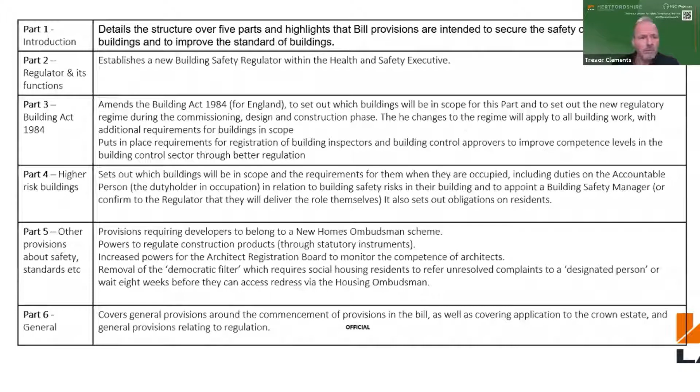Now, in a previous briefing, some of you may remember I mentioned comments from the Parliamentary Scrutiny Committee about the draft bill that were particularly relevant to the Building Control Service. This was recommendation 21. The committee said that we recommend that duty holder choice be removed entirely from the building control system. Wow, that's a radical step, isn't it? And it be replaced by a system of independent appointment, and that this be made explicit either in the bill or in secondary legislation to be published alongside it.

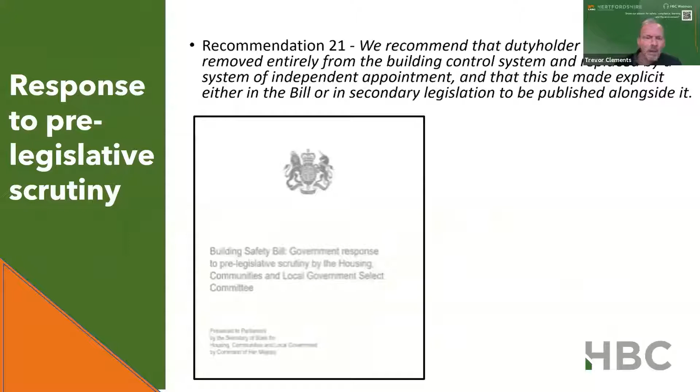Pretty groundbreaking stuff. Well, I think most of us in the know anticipated it wasn't going to happen. The government felt that the introduction of new rules to oversee the competence of building control professionals was sufficient. What you see there is paragraph 423 of clause 43 that amends the Building Act to require that building control authorities and registered building control approvers must obtain and consider the advice of a registered building inspector each time they want to make a decision on a restricted function - i.e. going about the role of building control, checking plans and checking work on site.

For building control authorities, in the case of failure to use a registered building inspector to carry out restricted activities, or to seek advice from a registered inspector, their building control decision could be called into question and subject to judicial review for failing to follow the legislative process.

So we're going to need to employ surveyors who've demonstrated their ability to work on the different grades of buildings that we cover. We cover everything from the 30-storey block of flats to Mrs. Bloggs's rear extension. Anybody involved in those schemes has to demonstrate they're competent to do so and be independently accredited for that.

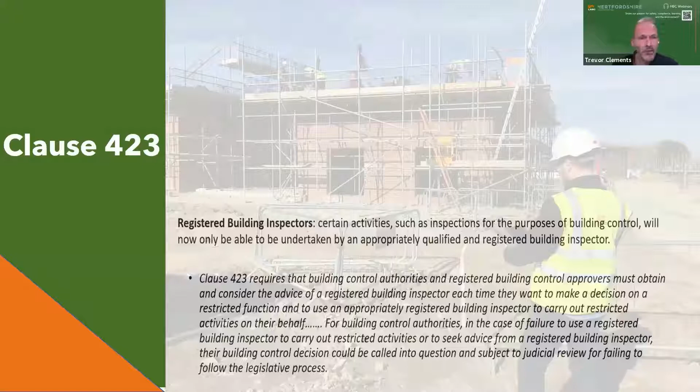Anyway, enough of that, that's not what you signed up to hear about. Let's move on with the Building Safety Bill.

So in addition to these new rules for our surveyors, the new Act will also place duties on those who procure, plan, manage and undertake building work. These duty holders will be required to actively consider and manage building safety risks throughout the commissioning, design and construction processes, ensuring that their designs, as well as the building work, comply with building regulations requirements. There are three main roles for the construction process: the client taking the responsibilities, the principal designer and the principal contractor. Effectively what it's doing is placing additional building safety responsibilities on the duty holders identified in the CDM regulations that came in 2015.

So there you've got the principal designer. Obviously they would need to plan, manage and monitor their design work to ensure that if built, it complies with the regs, and ensure that all their designers in their team cooperate and communicate to that end. They also communicate, of course, with the client and the principal contractor.

And the principal contractor, of course, is appointed to be in control of the whole project during the construction phase, with similar duties to those of the designer, but in relation to the building work rather than the design work. This is a useful slide.

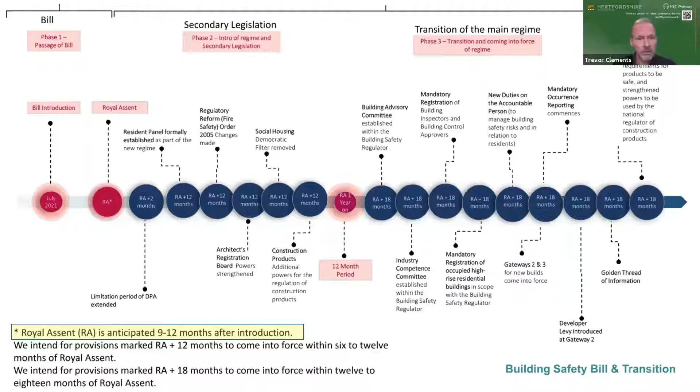So we already have a draft of some secondary legislation, so I thought I'd let you have a quick look at that, related to the bill. This is the Higher Risk Buildings Regulation 2021.

What it's doing is defining higher risk buildings as those with at least 2 residential units, and that includes care homes and hospitals as well. Whilst it does include care homes and hospitals, it excludes them from Part 4 of the bill, which relates to the ongoing control of occupied buildings. So I think they're seen as being professionally managed and not needing that sort of scrutiny once occupied, whereas flats will come under Section 4, Part 4.

So this legislation gives the definitions for care homes, hospitals and residential buildings. It specifies how height and the number of storeys should be determined. As we know, the building height for in-scope buildings, i.e. high risk buildings, is over 18 metres or more than 7 storeys. 7 storeys or more, and that's covered in the bill itself.

That's an arbitrary height, isn't it? Why do they hang their hat on that one? A lot of people are saying that could change. There's a few fire officers out there who've probably got some good informed opinions on that, because I think 11 metres is probably a height which might be more appropriate. That's a height I think I'm right in saying, and feel free to shoot me down on the chat if I'm wrong, but that's where external firefighting gets very difficult after 11 metres, in terms of the modern equipment used today. I nearly said don't shoot me down in flames, but that would have been a terrible pun, so I'm glad I didn't say that.

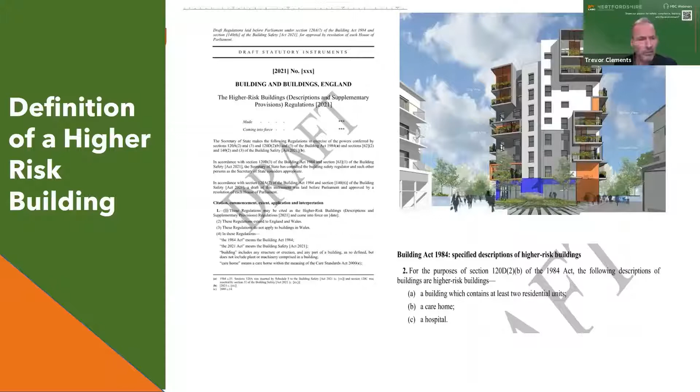Anyway, talking about all this 18 metres and flats and high risk buildings, it's easy to confuse the new rules with rules that have been in place since December 2018 for buildings over 18 metres containing flats. We've been applying those for some time now, and that has been quite problematic in insisting that facades only contain, or nearly all materials are non-combustible A1 or A2 class materials, which has had its challenges for anybody involved in those sort of buildings, which I won't go into because time doesn't permit, but it's been interesting.

A few key sections in the finished bill. We're extending the limitation period on the Defective Premises Act, which was 6 years, and is now going to be 15 years. In other words, this is the time in which a homeowner has a right to look for compensation. Time will tell how that might influence an already difficult insurance market, and we'll also have to look at how there may be implications for the liability of local authorities. This will all affect the insurance market in a bad way, and we don't need it to get any more tricky, that's for sure.

The bill also enables building owners to levy a building safety charge on leaseholders. There were changes made from the original draft so that this charge can only cover the ongoing costs of the new regime. They can't use it to cover historical defects in the building to carry out remedial work. So that's the building safety charge on leaseholders.

There's a lot of money involved here because there's also requirements for building owners to consider alternative funding. If they're going to place charges on leaseholders, they must firstly demonstrate that they've explored all reasonable options for raising the cost of remedial works by other means before making a charge to those leaseholders. So there may be government grants available, there may be warranties attached to the buildings, there may be a potential for litigation whereby that money can be raised without making a charge, and it's now mandatory that they consider that.

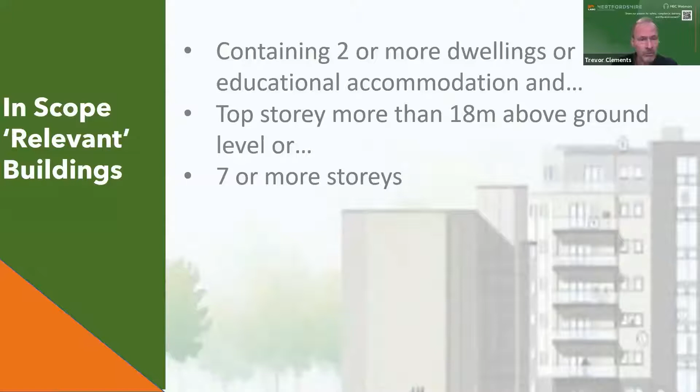As mentioned, the scope may change, and we'll keep our ear to the ground on that. This is relating to full planning applications, not outline ones, they're exempt. And the other gateways, 2 and 3, construction stage and then completion and handover stage, will be introduced much later on, as you saw from the schedule in a previous slide.

So on those buildings, to go through Gateway 1, planning must consult for the provision of a new building that's in scope, the development of an existing building so that it becomes in scope, or is already in scope and is being developed, and development within the curtilage of a relevant building, because as we know, changes can be made that have an effect on access to the building for fighting a fire in the building. You know, Grenfell taught us that, and lessons learned, too late in that case, unfortunately.

So what will applicants have to do? Well, they'll be required to submit a short and concise fire safety statement to planning. It's similar to an access statement, if you know what they are, and won't be anywhere near as detailed as a fire safety strategy. That comes later. That's the sort of thing that we need at Gateway 2, and building control would be scrutinising that. But this is something a little bit more simple.

And as you probably know, the consultee role will be taken on by the new national regulator when set up. So at the moment it's the HSE, but it will go to the new regulator.

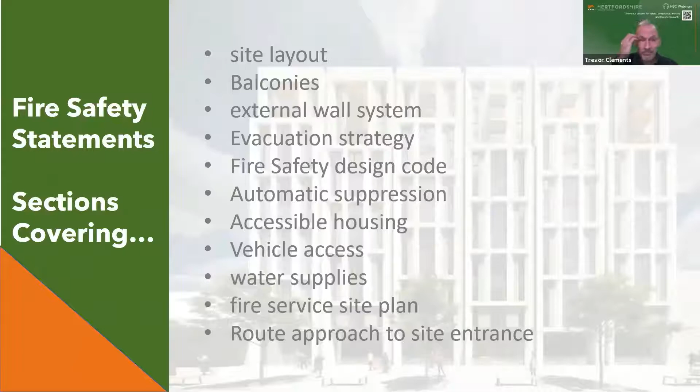Hydrants, dry risers, wet risers, access points to buildings. I could go on, but I won't. But these are all things that are allied to building regulations compliance in terms of B1 and B5 in particular. So that's the bones I was mentioning on the building safety bill.

Before I move over to a few slides on the Future Homes Standard, just a quick slide showing the proposed setup of the new regulator. You see he's got four strings to his bow - I can say he because it is a he, we've been told, well, he's already appointed. Peter Baker, who was already with the HSE, was appointed as the first chief regulator of buildings. And this is what he'll be doing.

So he'll be overseeing the performance standards of the building control profession, looking over our shoulder, overseeing the competency of the construction industry. So all those duty holders, the individuals and organisations with statutory duties under the new legislation will be regulated by him.

And he'll be coordinating the Building Advisory Committee - that's a new organisation that will replace BRAC, the Building Regs Advisory Committee that used to exist. And of course, there's the big new role as the regulator for high risk buildings, working with our good friends at the Fire Rescue Services and with local authority building control to assess schemes at gateways 2 and 3, and open that gate for people, hopefully, when things are seen to be compliant.

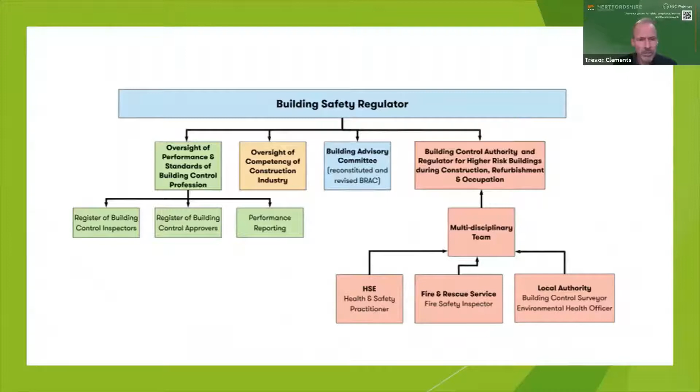So just a few slides now before we conclude, covering the Future Homes Standard. This is coming in 2025, and it's a big step towards the government aim of net zero in 2050.

And I know our little Scandinavian friend said blah, blah, blah to that, but I'm going to take it seriously, and we're going to do our best to do our bit towards that aim.

There'll be a 12-month transition period from then, meaning any applications received before this date must start work by June 2023. So once the bar comes down, you've got a year's grace to start the work. But something to take on board: this applies to individual buildings, so that might be a house or a block of flats. You just can't start to build one unit in a residential development of 50 and expect it all to comply with old regs. Anything not started within that 12 months will have to meet the new requirements, and that will be quite onerous - there are going to be big implications in meeting those new standards.

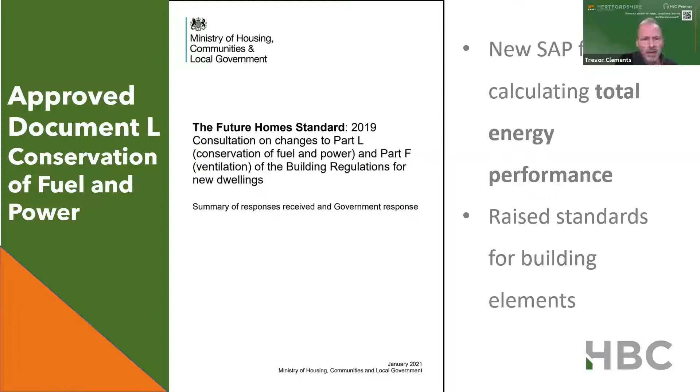So please don't ask too many questions on that subject.

What else can we expect in the new Approved Document L? Well, as anybody would have guessed, there's reduced U-values for walls, floors, roofs, doors and windows. That's not only in relation to the notional building that sets the targets for new buildings in the SAP calculation, but also for alterations and extensions to existing buildings. So it's going to be even harder, and the cavity wall insulation people are going to have to scratch their heads again and come up with new solutions. We'll have to rewrite our book on U-values of elements and solutions, which has been much used around the country, but will become obsolete - that will take a bit of work.

Apart from that, there'll be tighter targets for air leakage, and because of that, there will be changes to Approved Document F dealing with ventilation, so that ventilation is compatible with those more airtight standards - because it's so critical that this doesn't adversely affect indoor air quality, which is poor enough as it is.

There's increased heating system efficiency targets and smarter control systems, and that will include mandatory use of independent thermostatic controls in every room, and that will also include existing dwellings where they're being altered, and there's limits on the temperature of primary flow to radiators, etc.

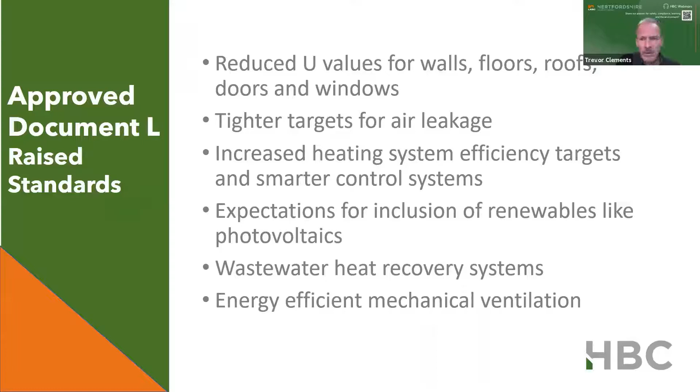Quickly, more detailed guidance on approved document F, which covers ventilation, which we're waiting on. There'll be more detailed guidance on considering external pollution when designing for ventilation in built up areas. No point in having windows and vents and things like that if you're right next to a busy road and you're just going to bring traffic fumes into the property.

So nobody's ever going to open those windows. Tighter controls on retrofit work, recognizing how these changes can introduce air quality issues. The simplest one being you change out the windows, you suddenly lose all the infiltration that was occurring in the more drafty older windows, and then you get condensation issues and air quality issues.

So it's tighter controls on providing trickle ventilation and things like that. We're told the guidance will be simpler and unambiguous. Fantastic, hallelujah, because it needed to be.

If ever there was an exercise in overcomplicating a simple subject, the old approved document F was that, in my opinion, and some may disagree.

Also, we're looking to see mandatory guidance for homeowners on the systems installed. So builders will have to give little manuals to people so that they can use their new homes in a safe, sustainable and healthy way.

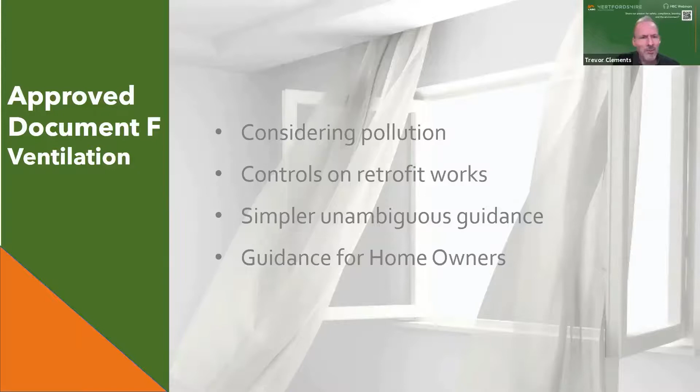But there you go. Sorry, a bit of a soapbox moment there, and I'll get back off it and get on with the rest of the webinar, which is not long to go. You might be glad or sad to hear.

So as mentioned earlier, there's a new approved document covering overheating that we're going to get.

We need to design out energy hungry air conditioning systems for summer use. That's the intention. How does it do it? Well, it gives provisions for limiting unwanted solar gain.

You're going to get maximum glazed areas, being, we think, 21% of floor area, and provisions for the removal of excess heat from indoors, so minimum opening areas for windows. Max glazed areas, minimum opening areas, we think around about 12% of floor area.

There will be two methods, either a simple method, so a fixed set of design rules, or dynamic thermal assessment, with reference to a guidance note. I think it's one of the CIBSE guides, TM59, which can be used for a dynamic thermal risk assessment to design a building.

Again, consideration to external noise and pollution is being addressed, cross-referencing to Approved Document F on those topics. Consideration of the security of ground floor windows cross-references to Part Q of the building regulations. People won't open windows to let heat out if it leaves the building insecure and they're not in the building, so strategies to mitigate against that will be covered.

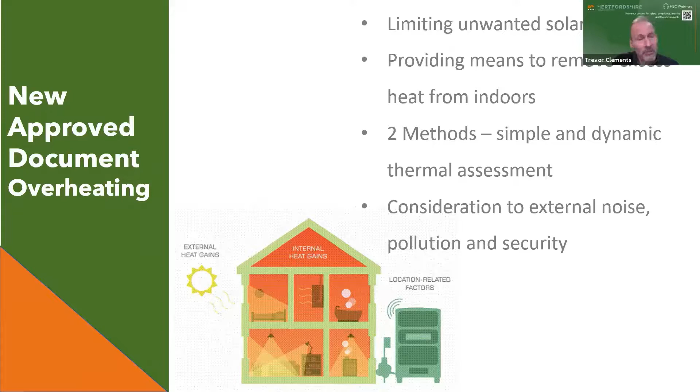As with ventilation, there are rules on making owners and occupiers aware of how to use the building effectively, with these mandatory home user guides. So a good thing, and something we'll have to make sure in our job that they get passed over to owners, get in the habit, and probably ask for a copy of them to be placed on the building control files.

So that's me. There's one more slide to go.